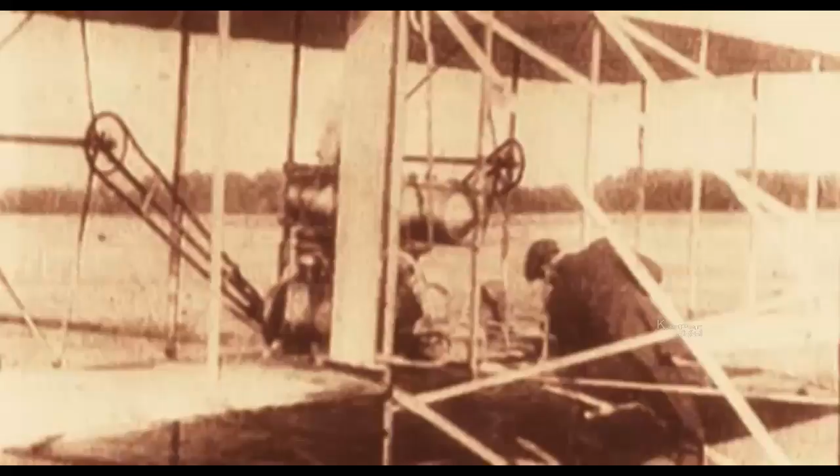The story of aviation is about the mechanics, the pilots, the inventors, and the thrill-seekers. It's a story of ingenuity and perseverance, of a dream that refused to die. The early years of the 20th century were a time of discovery and wonder in the world of aviation. People watched in awe as pilots entered a domain previously reserved for birds.

With courage, skill, and sheer bravado, pioneer aviators notched up a long line of record-breaking flights using innovative technology that still astounds today. The men and women present at the birth of aviation continue to inspire. Ignoring the naysayers, they risked their lives to bring us the magic of flight.

In the early days of aviation, there was no limit to the imagination of some inventors. Not all prototypes were successful, but it was only a matter of time before mankind spread its wings and launched into the sky.

A French sea captain who experimented with gliders in the mid-19th century wrote, "In spite of me, it drew forward into the wind. Notwithstanding my resistance, it tended to rise. Thus I've discovered the secret of the bird, and I comprehend the whole mystery of flying."

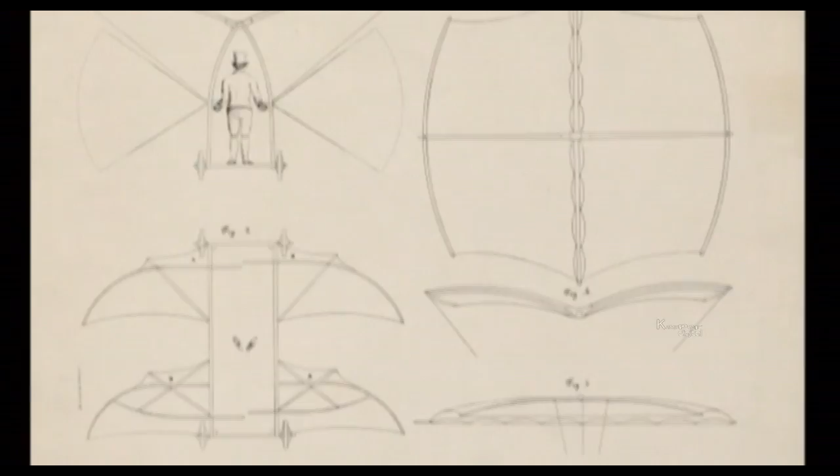It was a mystery that obsessed ancient travellers who dreamed of voyaging in winged contraptions. Elaborate designs document this desire, transforming man into bird with the addition of sail-like wings. Not surprisingly, the prototypes never flew, but each added to the sum of human knowledge.

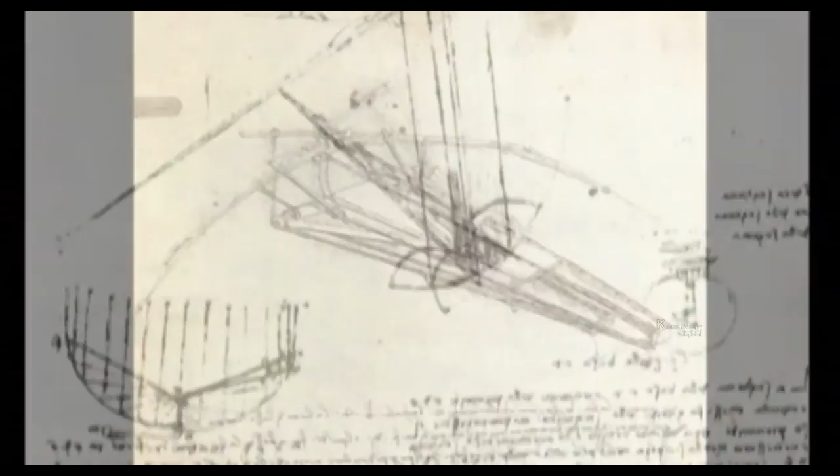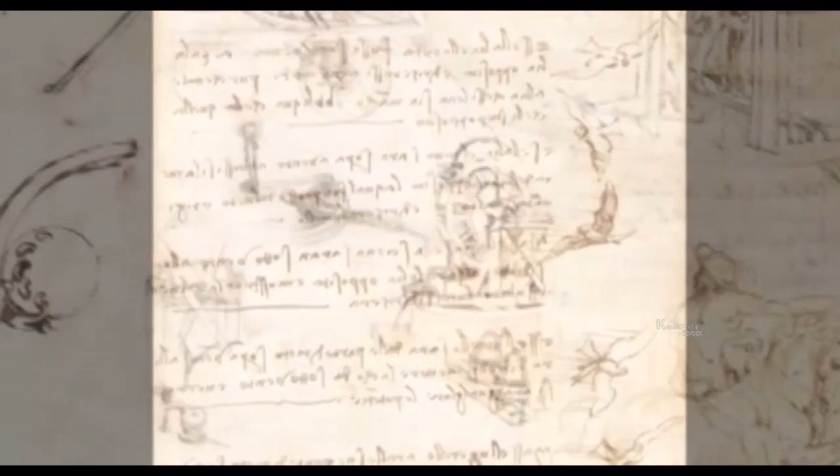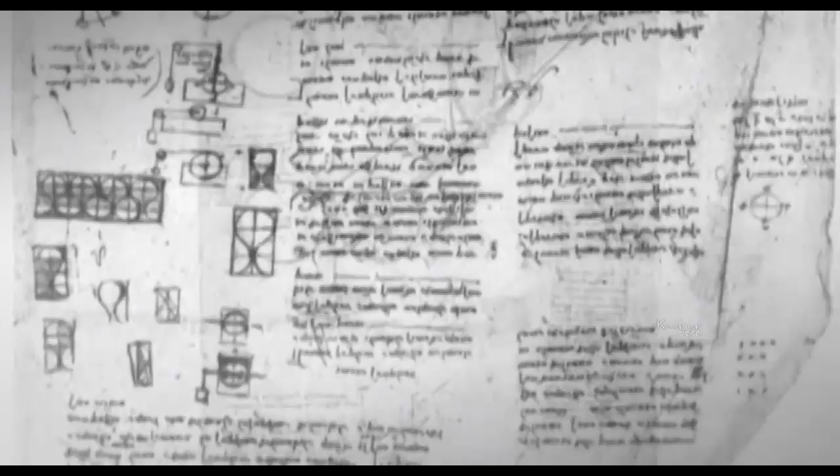Artist and inventor Leonardo da Vinci was the most famous early aircraft designer. The medieval polymath drew up blueprints for many inventions in his meticulously detailed diaries, including a helicopter and a hang glider. Da Vinci was particularly fascinated with birds, producing a study in 1505 called Codex on the Flight of Birds, in which he noted that the centre of gravity in a flying bird did not coincide with its centre of pressure. The Codex also included several flying machine designs, but when the great inventor built them, they failed to launch.

Da Vinci was a man far ahead of his time. His paper designs highlight his incredible scientific skills and ability to think in 3 dimensions. As well as flying machines, Da Vinci designed a giant parachute, foreshadowing a technology that was still 200 years away from becoming a reality.

In 1783, in front of the French royal family, a balloon designed by the Montgolfier brothers made the first recorded manned flight. "The English, a haughty nation, arrogate to themselves the empire of the sea. The French, a buoyant nation, make themselves masters of the air," said the future Louis XVIII.

Joseph and Etienne Montgolfier were from a family of paper manufacturers. They shrewdly married solid engineering principles with beautiful design, making their balloon ascents an eye-catching experience. The Montgolfier prototype balloon was made from paper lined with alum for fireproofing and held together by 2,000 buttons. The sight of humans sailing through the air was remarkable enough to 18th century Parisians. But to add to the wonder, the Montgolfier brothers commissioned their balloon to be an artwork.

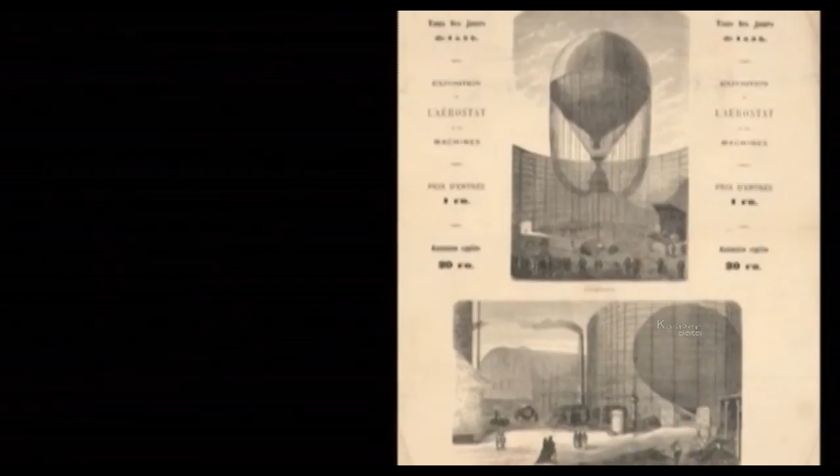The beauty of balloons drifting through the air was undeniable, but it was a dangerous pastime. In 1785, Pierre Roman and Jean-François Pilâtre de Rozier became the first people to die in a ballooning accident when they crashed to Earth in a hydrogen-fueled fire. 12 years later, Frenchman André-Jacques Garnerin became the first person to make a successful parachute descent from a balloon. His canvas umbrella contraption brought him safely to Earth from a height of 3,000 feet.

Ballooning technology continued to improve, with aeronauts turning to rubber-coated silk as the material of choice. Slung beneath the huge envelope in a wicker gondola, pilots added hydrogen to the envelope to ascend. As hydrogen is lighter than air, the gas displaced air molecules and lifted the balloon higher. To descend, the pilots simply opened valves and released hydrogen.

Balloon ascents were a popular spectator sport in the 19th century, but some balloonists raised the ire of farmers whose crops were trampled by people eager to get close to a landing. In 1873, French aeronaut Jules Duruof and his wife made an unscheduled landing into stormy seas when their craft, the Neptune, was swept out over the ocean. Fortunately, fishermen rescued them. A talented scientist, Duruof invented a scheme to steer balloons using sails and drag ropes, paving the way for future experiments in controlled flight.

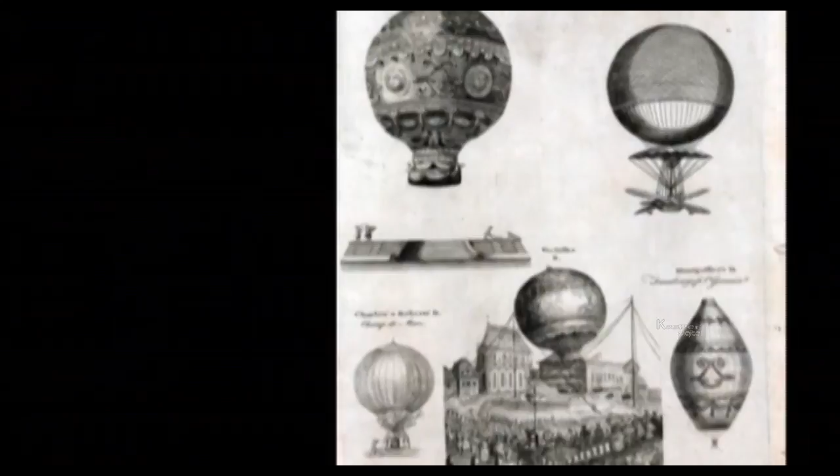Artists of the 19th century looked to the future and came up with their own versions of flying machines. And the military found new uses for balloons, with Thaddeus Lowe carrying out reconnaissance in a Union Army balloon during the American Civil War. One man who observed the fascinating spectacle was a visitor from Germany, Count Ferdinand von Zeppelin. Early aeronauts were at the mercy of air currents, with ascending and descending the only part of the flight they could control.

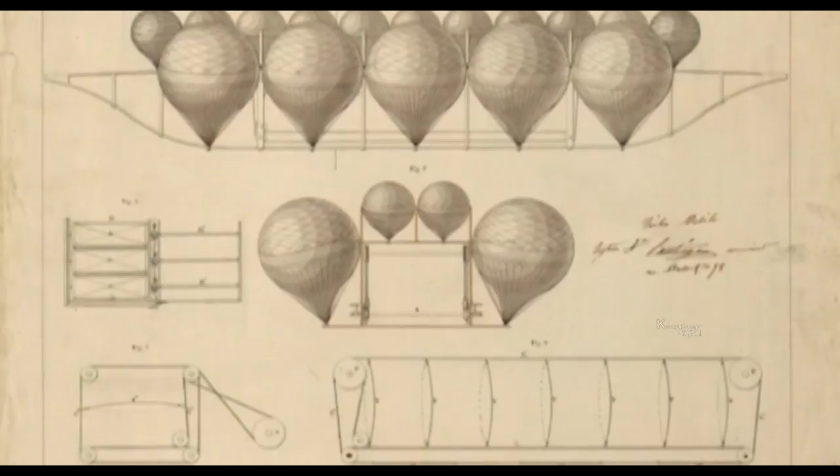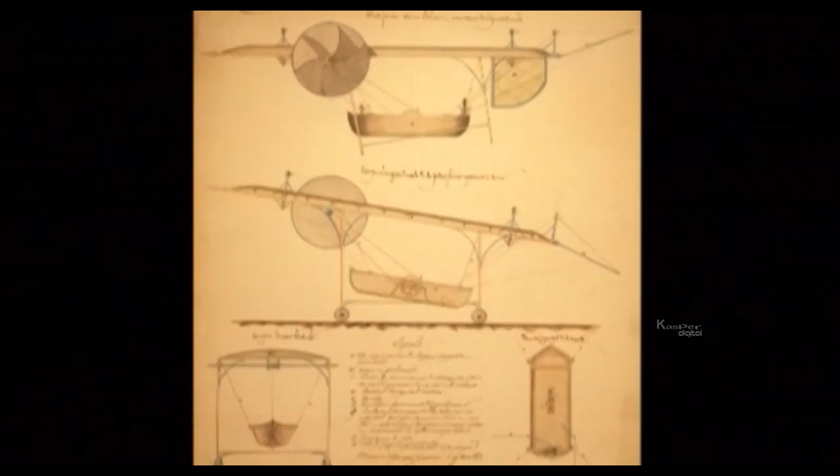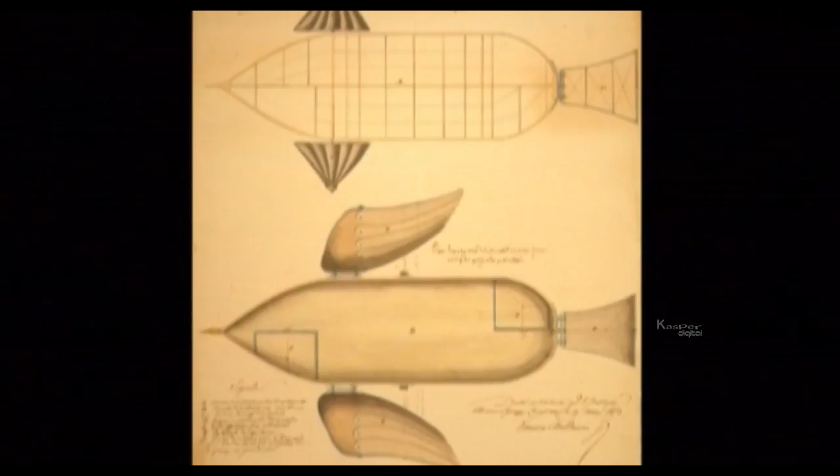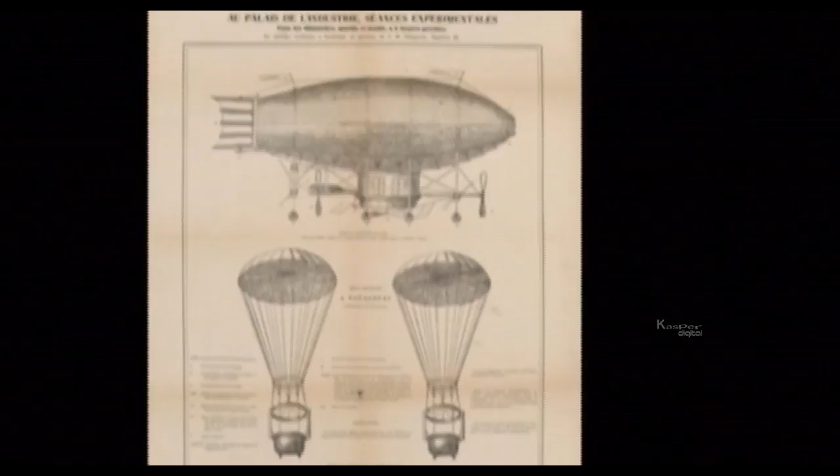After observing the first balloon ascension, American scientist and statesman Benjamin Franklin wrote to his friend Sir Joseph Banks, "These machines must always be driven by the winds. Perhaps mechanic art may find easy means to give them progressive motion." By the mid-19th century, aeronautical inventors were closing in on the technology that would provide progressive motion. In 1852, Henry Giffard flew the first flight of a steerable balloon, managing 17 miles at a top speed of 5 miles an hour. However, the craft's steam-powered engine was too slow to control the vehicle.

Alberto Santos Dumont demonstrated the maneuverability of airships by taking his gasoline-powered craft on a flight around the Eiffel Tower, for which he was awarded the Deutsch Prize in 1901. German army officer Count von Zeppelin was determined to put Germany at the forefront of airship development. He used his own money to build the Luftschiff Zeppelin, or LZ-1. Powered by twin Daimler motors, it flew for 20 minutes on July 2, 1900. It was the beginning of an era of glory for German aviation.

Zeppelin's inventions inspired public support, and he was able to finance future airships through donations and a lottery. But like all aviators of the era, Zeppelin struggled to keep his monster airship under control. In 1908, his Zeppelin LZ-4 was caught in a storm and crashed, injuring 4 people. The disaster virtually bankrupted the Count, but with public support he persevered with his airship program and went on to greater things.

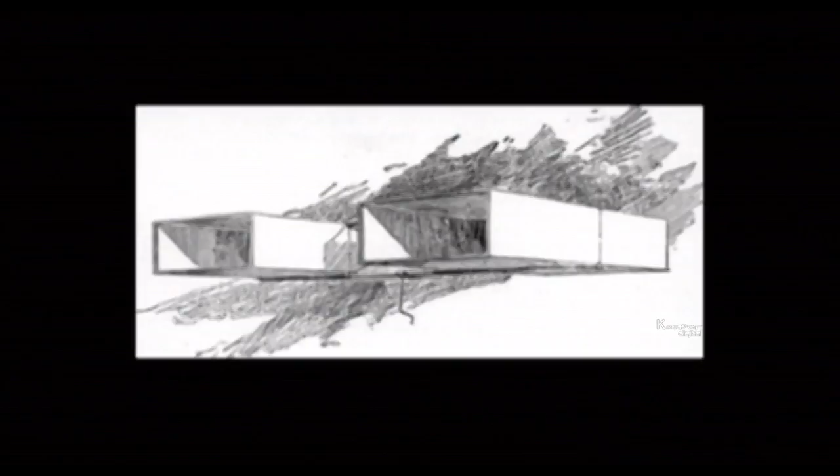Lawrence Hargrave emigrated to Australia from England as a 15-year-old with his family. He worked as an engineer and an astronomical observer before inheriting his father's fortune and devoting his life to aeronautical research. On the 12th of November 1894, at Stanwell Park Beach near Sydney, Hargrave used 4 box kites tied together to lift himself from the ground. He ascended 16 feet in a wind speed of 21 miles per hour. Aviators looking to improve the lift-to-drag ratio of early gliders eagerly followed Hargrave's breakthrough.

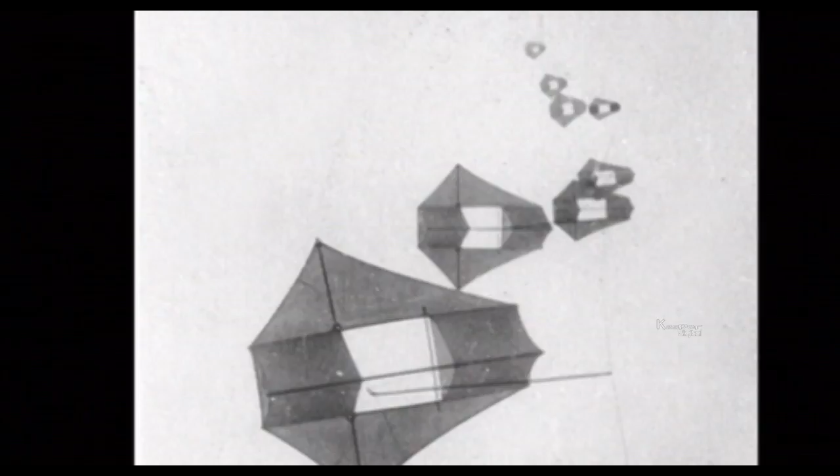A pioneer who used both kites and airships in an innovative way was photographer George Lawrence. Lawrence designed his own panoramic cameras and used a string of 17 kites to hoist the equipment aloft, from where it took images of the Earth up to 2,000 feet above the ground. Lawrence activated the camera shutters by sending an electrical current through the kite's strings. When the shutter released, a small parachute fluttered down, signalling that the photo had been taken and the camera could be brought down and reloaded.

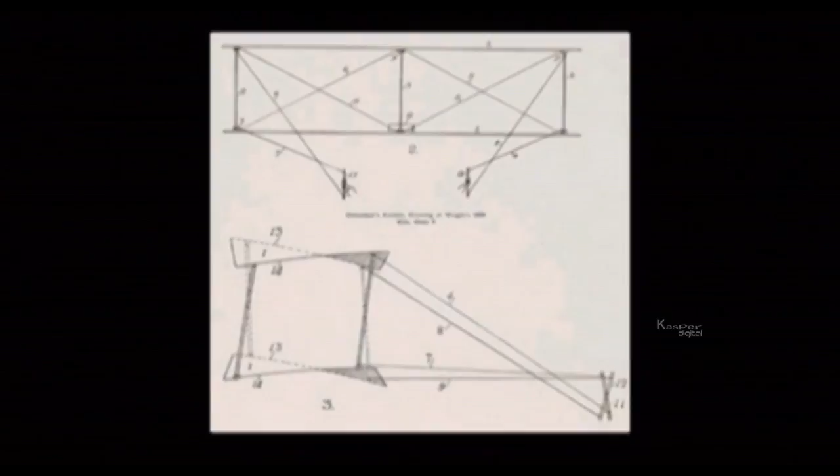But it was 2 brothers from Midwestern America who were to have the greatest impact on the world of aviation. Wilbur and Orville Wright grew up in Dayton, Ohio, towards the end of the 19th century. Orville was the more mechanically minded of the 2, while Wilbur loved the intellectual stimulation of study. Their mother, Susan, taught Orville and Wilbur how to make their own inventions. Aged 8 and 12, the boys were given a toy helicopter powered with a rubber band. The toy broke, so they built their own. There were 5 children in the family, but Orville and Wilbur were particularly close.

Wilbur later wrote, "From the time we were little children, my brother Orville and myself lived together, played together, worked together, and in fact thought together. We usually owned all of our toys in common, talked over our thoughts and aspirations, so that nearly everything that was done in our lives has been the result of conversations, suggestions and discussions between us."

As young men, the brothers opened their own bicycle sales and repair shop. The business proved profitable. America was in the grip of a cycling craze, and the Wright brothers designed and manufactured some popular bicycles. The business provided funds for the brothers to indulge in their real passion, aviation. Their sister Katharine took over the business, so Orville and Wilbur could devote more and more time to designing flying machines. Wilbur came up with a plan to use cables to draw the struts and spars of a glider together.

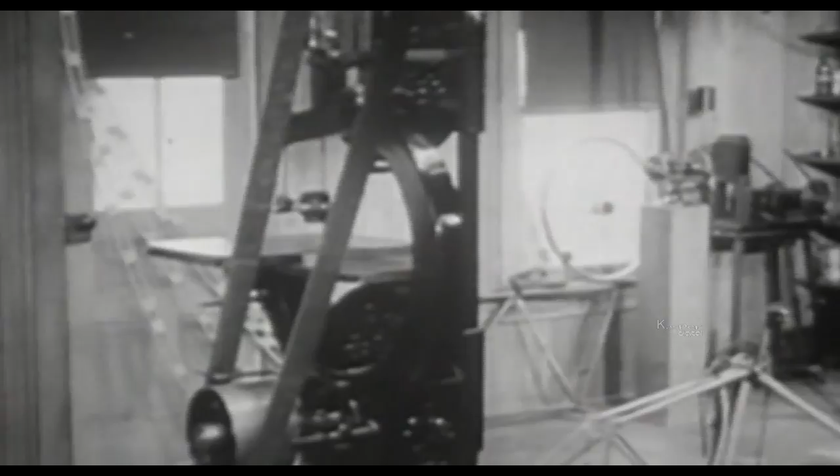Unlike other aeroplane prototypes, the pilot would actually have control. The brothers' initial interest in aviation had been sparked by the achievements of inventors such as Otto Lilienthal. The German gliding enthusiast made several flights, but constantly battled with the tendency of his gliders to pitch down, a characteristic that killed him in 1896 when he fell 17 meters and broke his spine.

The Wright brothers agreed with Lilienthal. The gliding experience was the best way to develop flying techniques that could be used with powered flight. But the poor lift of the gliders led them to suspect that the equation being relied on by Lilienthal and others was wrong. Their own experiments confirmed this, so they built a 6-foot wind tunnel to test various sized wings and balance lift against drag.

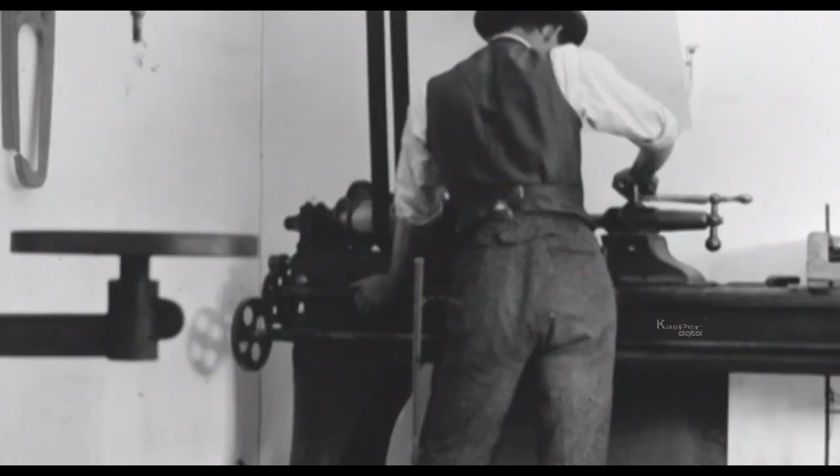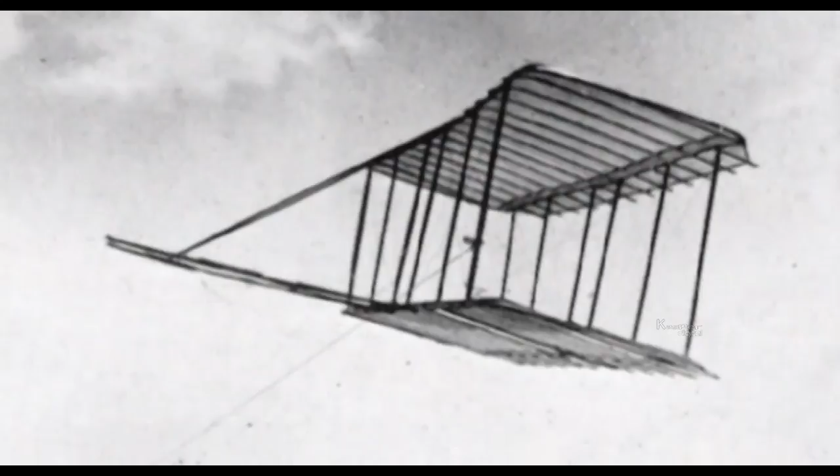In this way, they discovered that long, narrow wings provided a far better lift-to-drag ratio than the broader wings used previously. Through trial and error, Wilbur and Orville progressed from flying the glider as a kite to manned flights. The 1902 glider contained a movable rear rudder connected to the wing warping system, controlled by a hip cradle. With the problem of pilot control finally solved, the brothers were ready to add power.

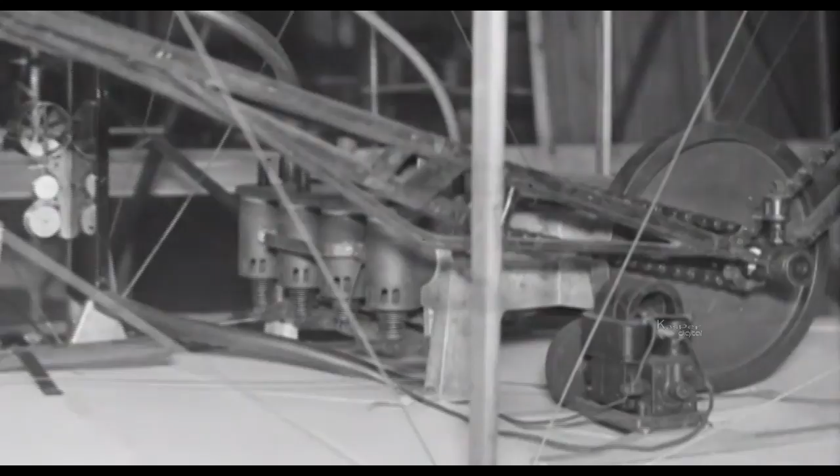On the 23rd of March 1903, they applied for a patent for their flying machine. The biggest problem was finding an engine light enough for the glider. None of the manufacturers the Wrights contacted were able to make one to their specifications. So the brothers decided to make their own. Their shop mechanic, Charlie Taylor, took just 6 weeks to build the lightweight aluminium design. On the 17th of December 1903, they put their powered glider to the test.

On the 17th of December 1903, they put their powered glider to the test. The wind was gusting at 30 miles an hour, and they were flying into a stiff wind. Orville took off, and in 40 feet he was off the ground. At that same moment, John Daniels took the historic, famous photograph. The plane in the stiff wind proved difficult for Orville to fly, but he was determined to stay in the air as long as he could.

He was in the air for 8 seconds, 10 seconds, 12 seconds later, 120 feet from the starting point. Orville landed the plane at the number 1 stone marker. It was only 12 seconds, 120 feet, but that was the first time man was able to break those bonds with the Earth with a powered flyer. Orville and Wilbur later wrote, "We realized the difficulties of flying in so high a wind, but estimated that the added dangers in flight would be partly compensated for by the slower speed in landing."

The brothers made 3 more flights, with Wilbur piloting the flyer more than 800 feet. Unfortunately, when they put the machine down to take a rest, a gust of wind blew it over and smashed it beyond repair. It never flew again. But Orville and Wilbur had already flown into the history books. For the next 2 years, they refined their designs until developing the Flyer 3, the first aircraft able to take off and land under pilot control.